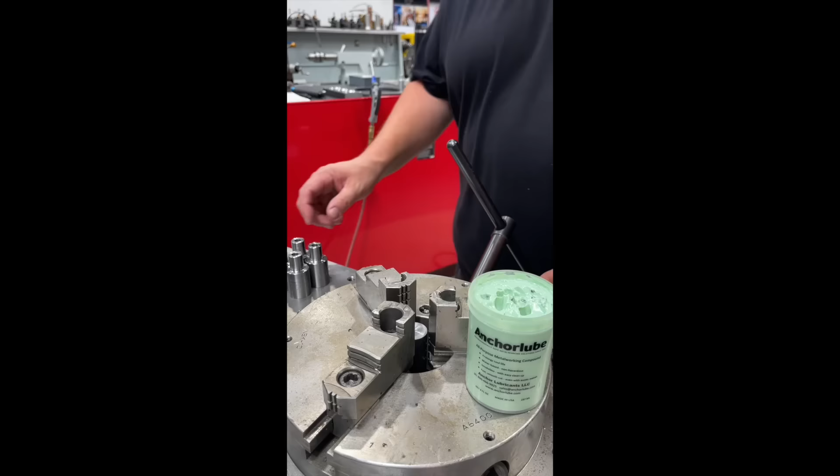Quick and easy. So I have ordered a couple of the Techniks brand collet chucks. This is the ER25 collet chuck. This is something I finally realized that they made. You know, Techniks has these on their website. This is made for the 1¼ bar holders that go on my CNC lathe, and then an ER25 collet goes in there. So I got a couple of these. I've already got one installed, and we're gonna go ahead and get another one installed here.

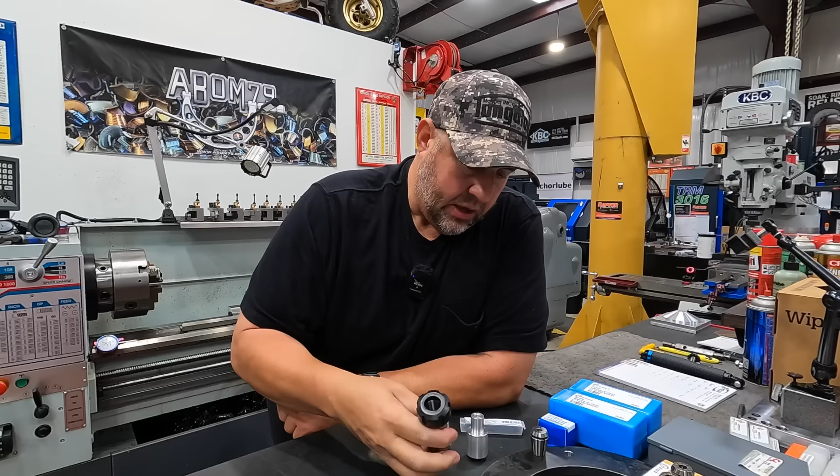I have a 5/16 tap collet right here. This is a Techniks, I ordered a set of these, so I've got them from 1/4 inch up to 1/2 inch in an actual tap collet. We have some new Cleveland taps right here, so this is a new 5/16 spiral flute tap from Cleveland. We have our tap collet made to hold a 5/16 tap, and we'll install that in the collet right there.

So excited about these guys right here. I think this is going to be better than the other collet chucks that I have on there already, but having these 2 on there are going to give me the ability to have 4 round shank tools on the CNC lathe. I'm pretty excited about that, because I needed to add a spot drill, then 2 different drill sizes, and then I wanted to be able to go back in with the tap. So I needed to have 4 holders there, so that's what we're gonna do.

Okay, I'm over here on the CNC lathe. I've already got the first collet chuck installed right here. These are the 2 that I previously had installed, and I'm liking these Techniks ER25 that fit the pocket so much that I've gone ahead and ordered 2 more of these. I'm going to remove these and just save them for if I need another pocket with a round shank tool, since I have another one of these blocks. That way I have 4 of these collet chucks that are all kind of equal on the stick out. So we're going to get ready to install that one.

I've already indicated the tool block right here using our coaxial indicator. Something I picked up on this job, big thanks to Steve Sherman over at Milltronics, he gave me this tip. I didn't think about this before: once you get one of these pockets indicated in X, these other ones should be in the same position because you're on the same rotational center line. I've been indicating each one of these individually and then doing an X tool to mark the X0 location. That's something I just realized. I should have realized this a while back, but I just didn't think about it. Pretty simple to do.

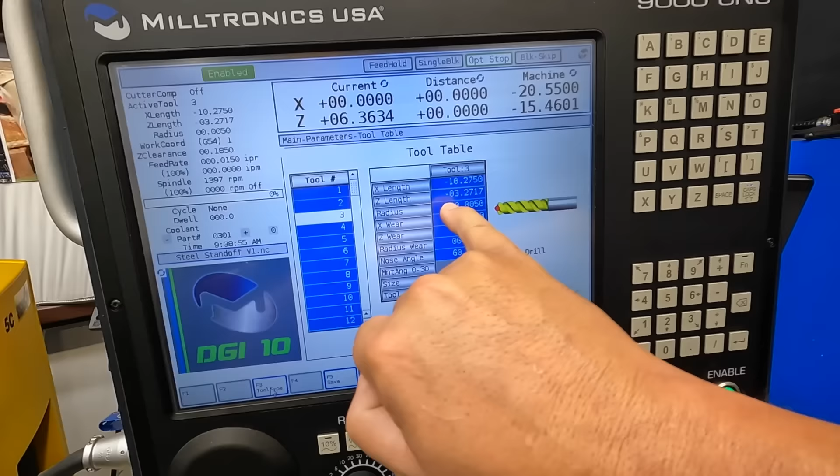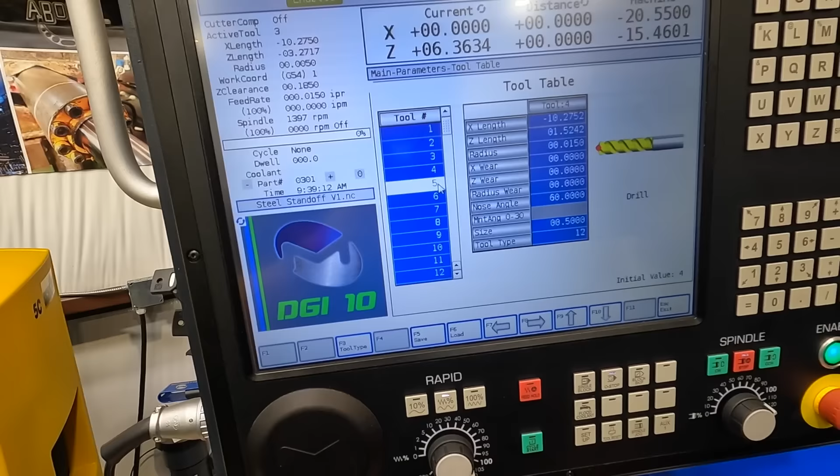Over here on the controller, I'm going to go back into auto mode. If we go to our parameters in the tool table, we have our X length, which is 10.275, using tools 3, 4, 5, and 6 on our tool turret. I've got these indicated, so they're really close, just using the coaxial indicator. 10.275, and then the last one, 10.274, so it's about 1 thou off from the other previous tools. That's the one we're doing right here, tool number 3, about 1 thousandths off.

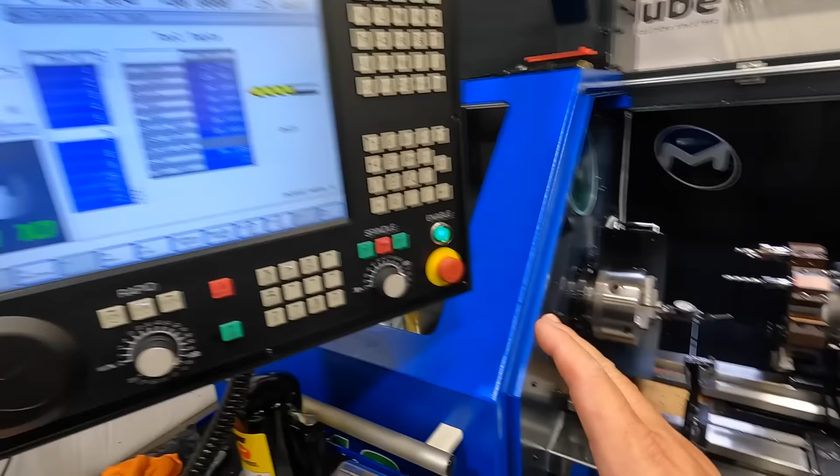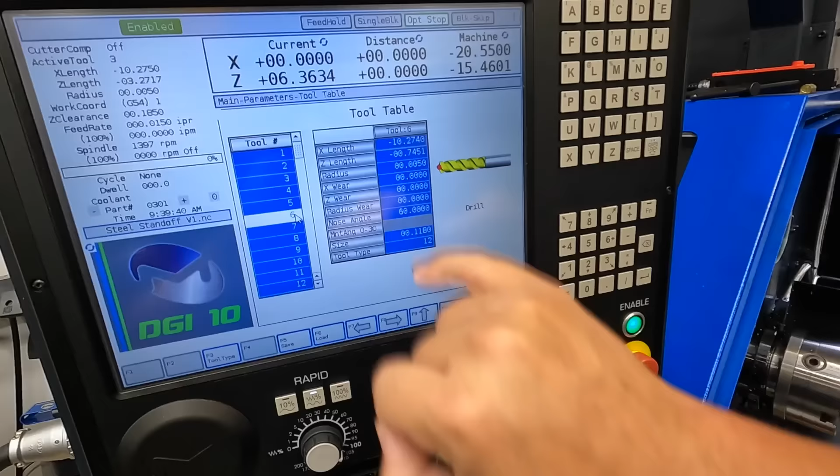So what I was getting at, because this is stuff I'm learning obviously, is that once you have one of these indicated and you have your X position, your X length, then you can go to the other tool and enter the same exact value that you already indicated for the previous pocket, making them all the same. Very simple, basic, I know, but I'm glad I finally picked up on that because I should have learned that a long time ago. So I don't have to do this every time I want to put a new tool in. This was the first time we stuck this tool block over on number 3, so I was adding one we haven't ever indicated before. Just a nice little trick I finally picked up here on the CNC. Always learning, but I'm really enjoying it.

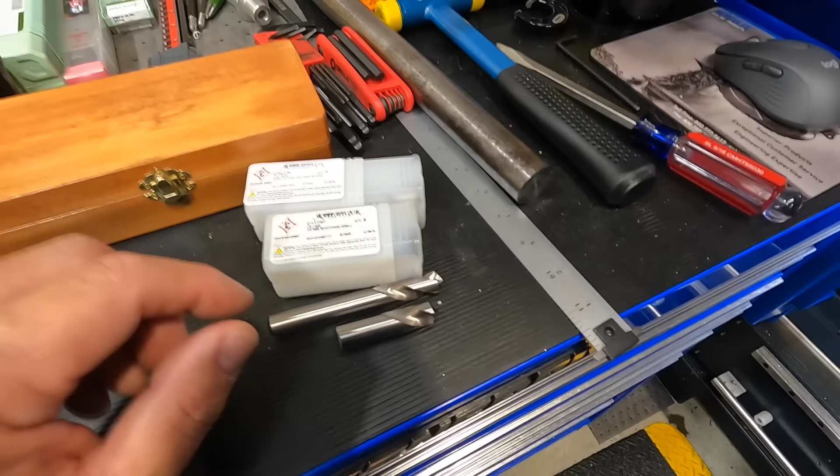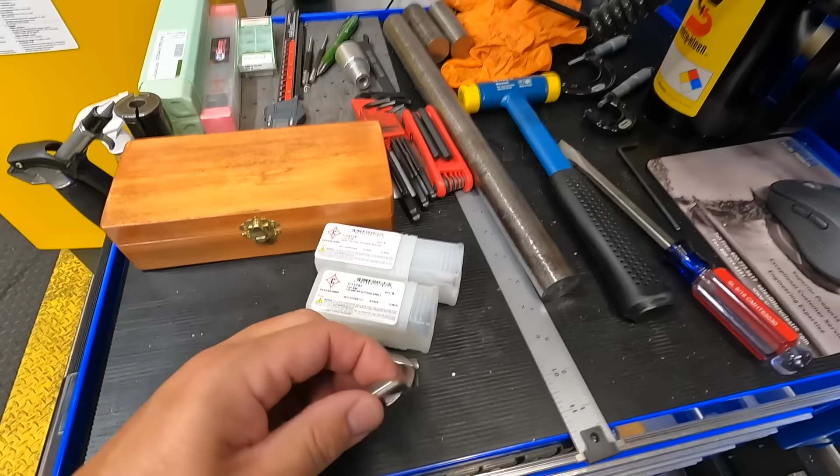This tool right here is our new Techniks collet chuck, and I have a 1/2 inch diameter spotting drill installed into that one. These are some spotting drills I just picked up from Cleveland. This is the one I have installed right there, and I needed a little spotting drill like this so I could spot our workpiece and then come in with the following drills. I didn't know which one I wanted, so I got these guys too. These are considered the shorts, they don't have any side relief on them at all, just ground to the diameter, but these work great for spot drills as well, just a little bit longer. So I'm going with this one right here, and it's been working well on my first 4 workpieces that we already did. I was going to point that out.

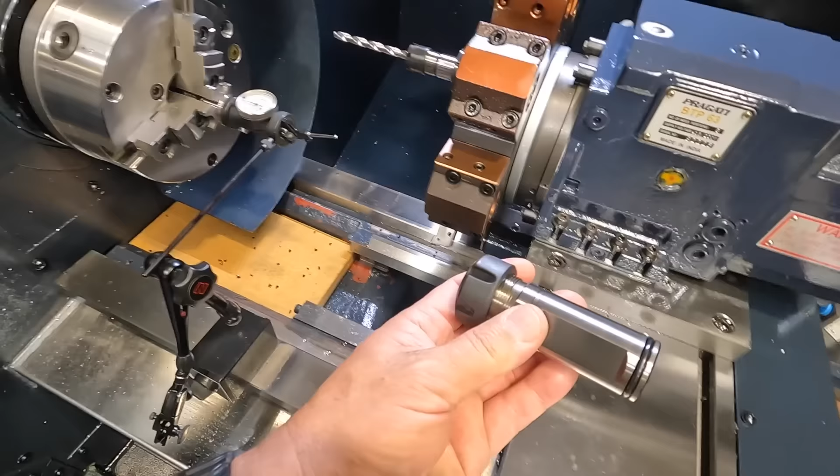This one we're getting ready to install right here is going to be our 5/16 tap. I've got the collet chuck installed, and I'm just verifying that I do have this in the center.

So that needle's wiggling less than half a thousandth on rotation right there, so I know that one's pretty good. This is a different manufacturer tool block than the previous ones here, so maybe it's a thousandth different on the center line. I don't think a thousandth on the rotational center line is really going to make a big deal, especially on drills. So I'm just going to leave it indicated where it's at. But if I add another one of these later on, now I know I don't have to do this - I can just look at the value of one of these in X and make it the exact same.

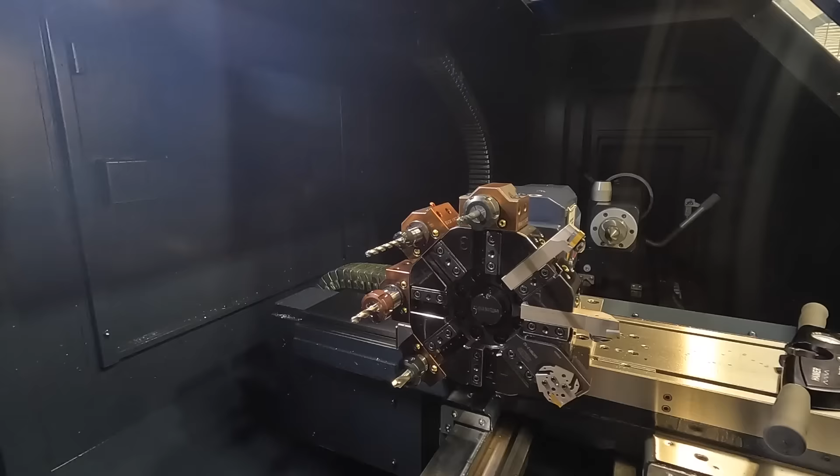All right, we got our new Cleveland tap installed. I'm going to use my Haimer Torque Master to get it torqued in properly.

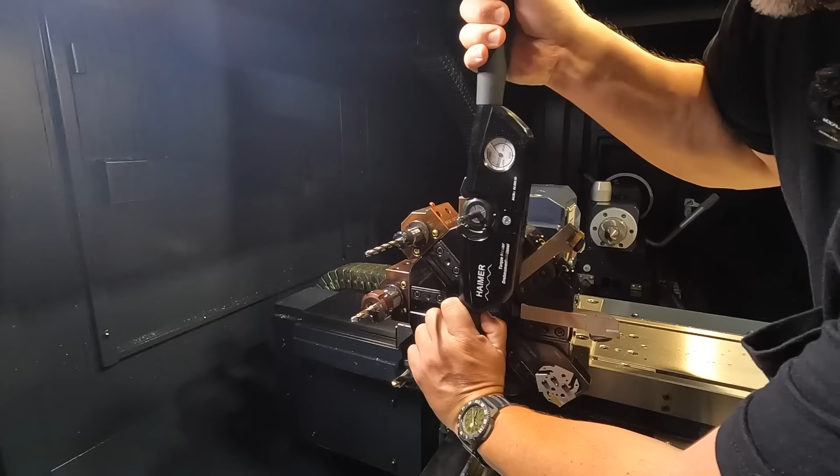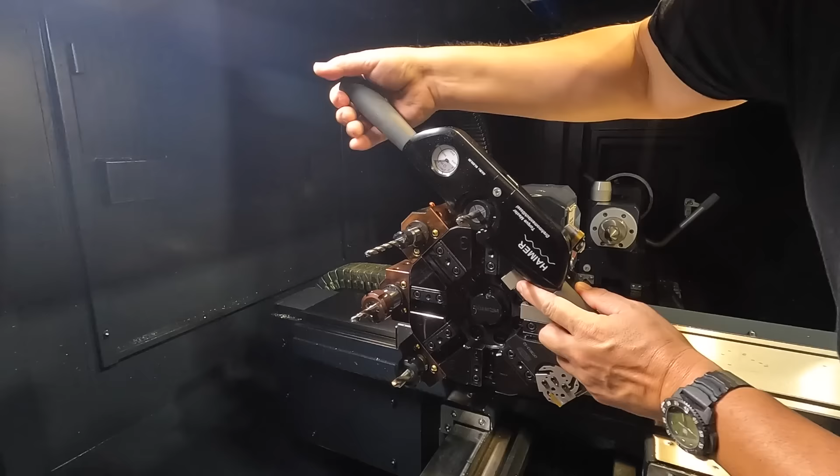You have a line on this dial indicator here indicating what size collet you're tightening, and you just line it up on it, trying to be sure that I don't slip off and split my hand wide open. That should be right, ER25. Give it another pull, make sure. Yep, I'm there.

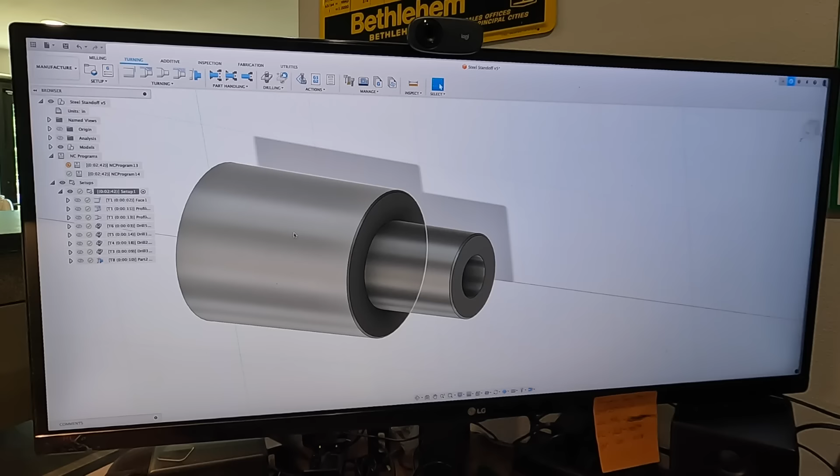We're starting with 1 1/4 inch cold rolled material. I don't know if I mentioned that - we're turning 1018 cold rolled. All we're doing on the outside is taking a 10 thou cut on there just to clean it up and make it look pretty, that's all we're doing. So the diameter on that doesn't matter. It's going to be a plasma cut hole that's dropped into, and then it's a fillet weld all the way around it. All right, so if we go back to our analysis there, we got it split.

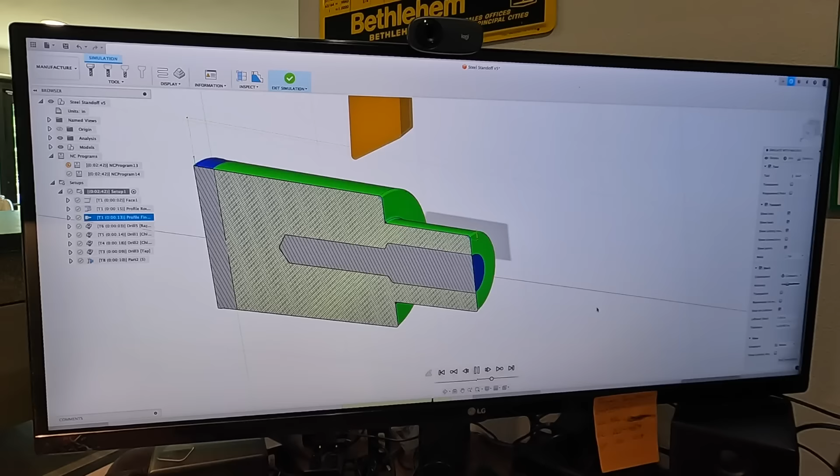I'm going to just do a simulation so you can see what it's going to look like here. Play our simulation, so we'll make a face cut. All right, and then we're going to rough off the OD there, and once it's roughed off, it's going to come back and make a finish pass all the way down it, clean it up. And then we'll come in with a spot drill, 3/8 drill, then our letter F tap size for 5/16. And notice, let me come back right here.

This area right here, what I have done is I've taken our letter F drill and I've taken it to an additional negative 125 thousandths, so 1/8 of an inch right here. I just wanted to point that out. So we gave that a little extra depth so that when we come in with our tap - this is going to be our tap right here - and I have it set to a positive 0.125 so that this should give me a quarter inch of leeway right here between the bottom of the hole and the bottom of the tap.

So this is obviously my biggest worry right here, is bringing the tap in and then bottoming out and snapping it off, or breaking it off otherwise. You know, I'm just really concerned about this. So you guys are going to see my first rigid tapping on the CNC lathe with this job right here.

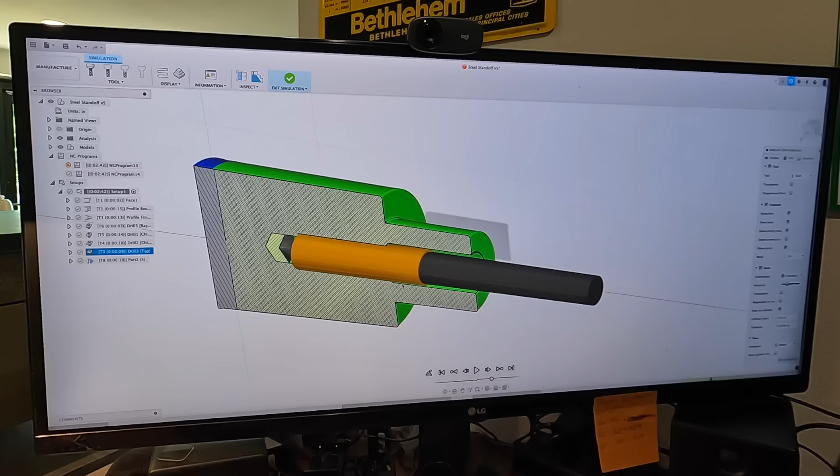All right, so anyway, we'll finish this out. Tap comes out, and then I did want to show you this. Let me back up and show you what we're doing right here. I'm going to bring this back around to the top, and let's come in. So this is our parting.

I've got my Tungaloy parting tool, it's going to come in. I'm going to slow this down, and what you're going to see it do right here, I'd like to chamfer the back side. So by the way, thanks to Kevin at Mechanical Advantage for going over this with me. I told you we train every week, and he goes over these programs and looks at them and helps me, and he made a suggestion on breaking this corner here.

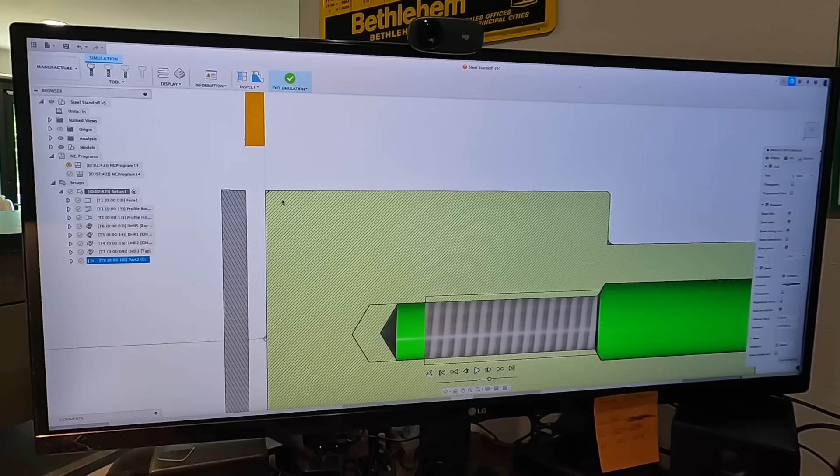So if you come in with our tool, let me see if I can do it this way. Tool's going to come in, it's going to go down to that depth right there to give us a little bit of relief in this corner. All right, and then it's going to come up. I went the wrong way.

Where you at? There we go.

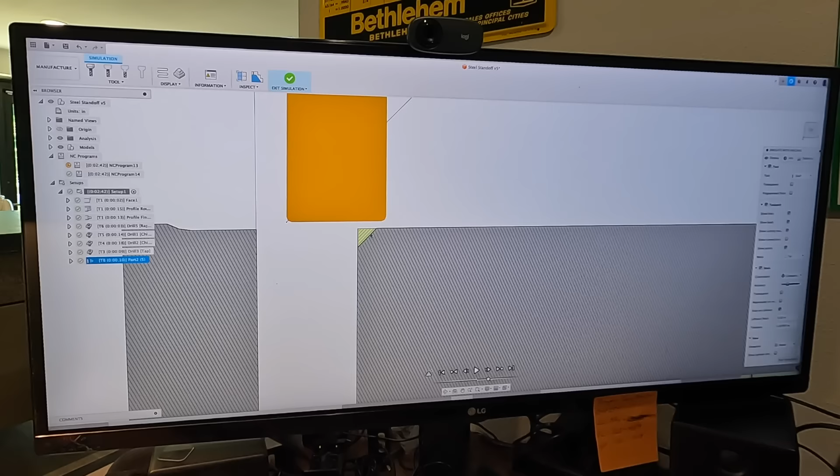All right, so it's going to come in at a 45-degree angle and break a 15 thou chamfer on that back side, just like so. Then it's going to continue on with the parting and part the piece off, like so.

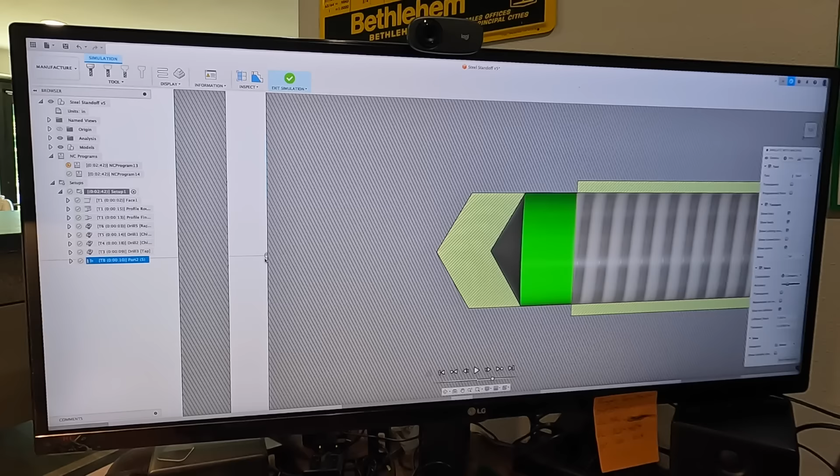All right, and then that'll be the end of the program right there, so that should be a finished part. The only thing I'm going to have left at the end is right here where the parting tool parts it off—there's going to be a little nub that I'll just take to the manual lathe and face off. It only takes 30 seconds to do that. Otherwise, we should have a completely finished part once we're finished.

So let's go to the lathe and see if we can make this happen. I'm ready to give this a go.

I wanted to point out, so when I do my stock here, I just pull it out to 3 1/4 on the rule, and then the first pass will be a face cut, and it'll clean up about 10 thousandths off of that. So rough it, finish turn it, and then we'll go to our drill cycles.

And I haven't tapped yet, so this is going to be the first run. I've already Z'd it, Z0 on the face after we faced it off there. Everything should be good, so if it breaks, it breaks. Let's just hit cycle start and see what happens, all right?

I'm gonna run the turning dry just so that it doesn't throw coolant everywhere, but I am gonna turn it on for the finish and for the drills as well.

These roughing passes look beautiful on this 1018. I will say that the finish pass doesn't do as well because we're only taking 10 thousandths, so it's going to try to string on us. What I'll do is stop the spindle and remove the bird's nest if it's on there.

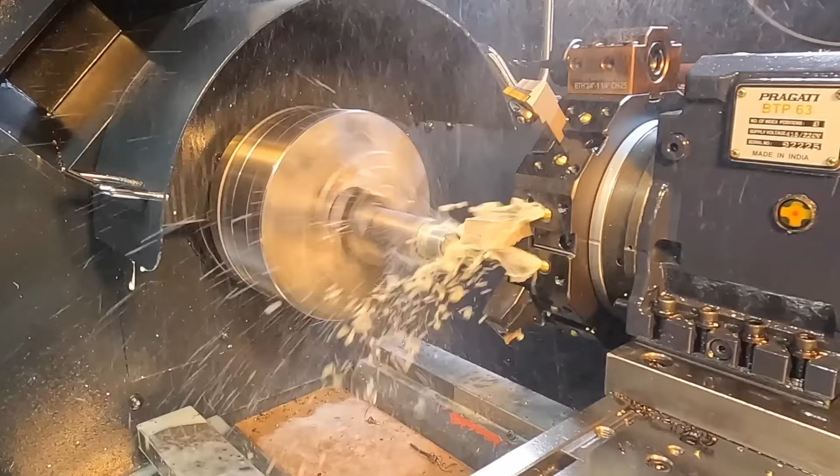All right, we're going to engage coolant. Clean it up 10 thou off that OD, and you see the stringy chips there hanging on the tool. So what I do here, I have an optional stop, and I just stop the spindle, come in here and knock that off, and then I'll start spindle and hit cycle start.

Let me make sure the camera is cleaned off. Actually, let me clean this off real quick. Okay, spindle clockwise, cycle start.

So first drill is going to be a spot drill. Second one's going to be our 3/8 drill. I have a breaking chip cycle on this just to break the stringy chips.

All right, letter F drill, tap size for 5/16. I've got those coolant nozzles adjusted as closely as I can to try to get the most coolant I can in those drills and on the tap as well.

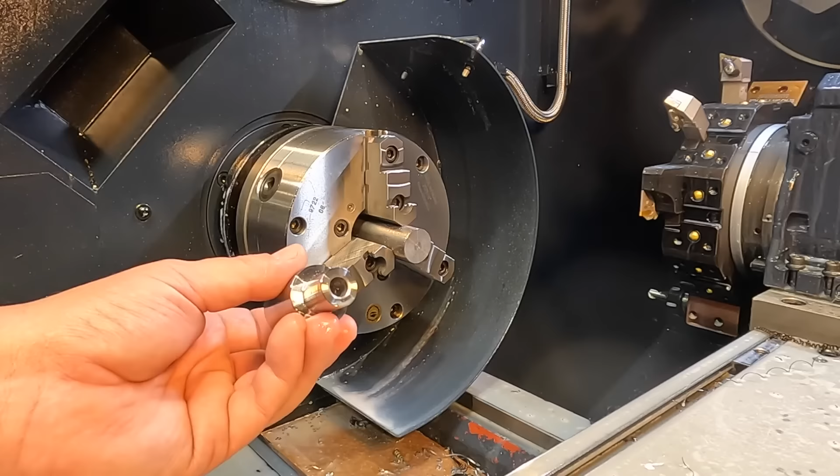I need to go back in our program and just make sure we're running on the correct pitch for 18 threads per inch. And we saw it in the graphics—it should not have went all the way down to the bottom of that hole. I don't know if the chips just bound up because we weren't getting coolant in there, but it really makes me nervous because it's such a deep hole.

We may just go ahead and eliminate this tapping on the rest of these and just go back to our flex arm and finish tapping the rest of them. I don't want to break another new tap.

I mean, that was a brand spanking new tap there, and I can't keep doing that. So we may just have to revisit our rigid tapping with a separate test piece and make sure that everything is functioning like it's supposed to and not on an actual workpiece. That's a bummer, but we're going to go ahead and get the rest of these finished. I'm going to eliminate the tapping cycle so that I can come back to that later.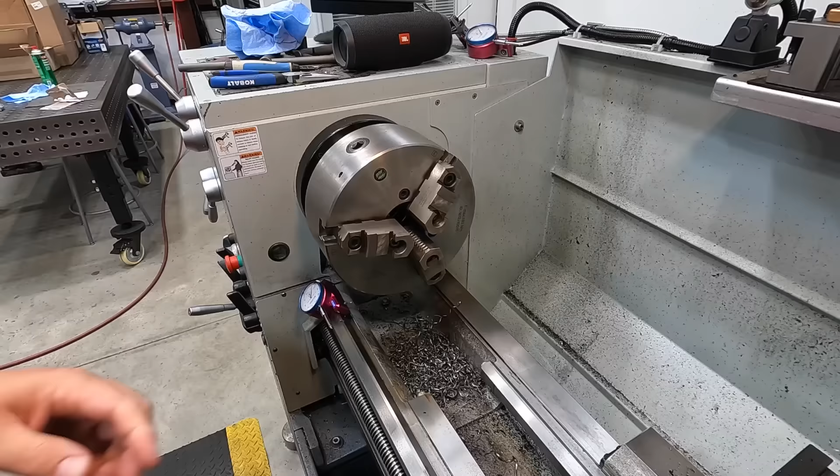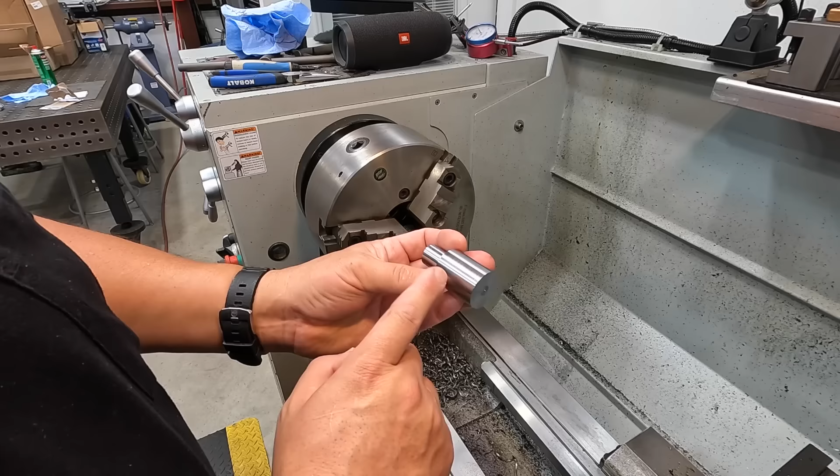All right, I had an idea. Before I continue on, I want to come over here to the manual lathe. I'm going to go ahead and sacrifice this part right here because I've got plenty of material to make another one. I want to go ahead and face the back side of this off so that we can access the tapped hole and see if we can tell if that tap is all the way in the bottom, if it bottomed out, or if there's a gap down there like it should be. There should be a gap in the bottom. That's what I want to see, because I'm wondering maybe it just didn't have any coolant getting down into the hole, since it is a very deep hole. It goes about 1 7/8 deep, and it could just be lack of lubrication that caused that tap to snap off.

Finally getting there, see it there, but I got to pull it out some. I can't go in there much deeper. That was 400 thousandths there.

All right, I think we should be able to see that.

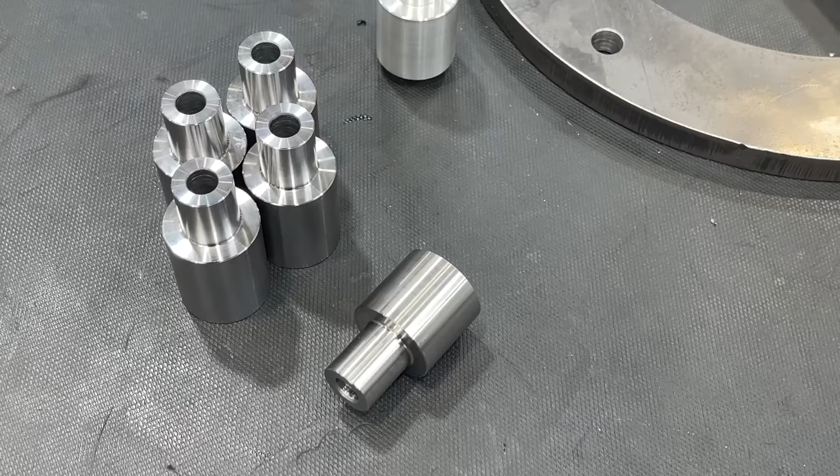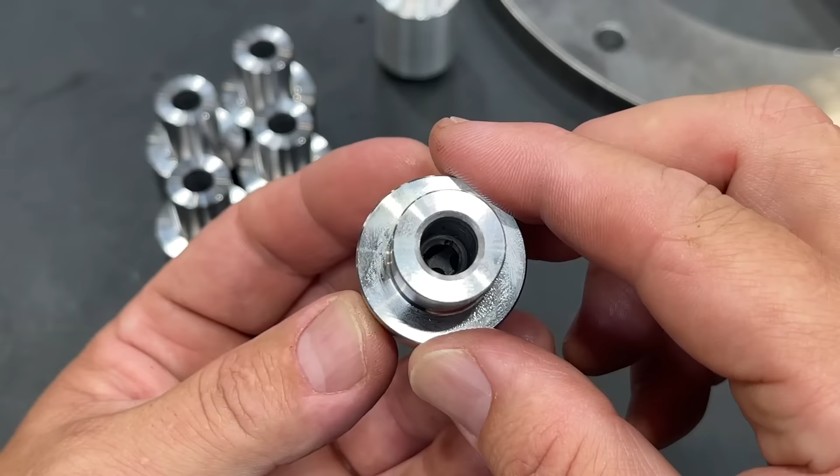Okay, here's a close look at the one where we broke the tap off, and you can see that the tap did not bottom itself out into the bottom of the hole there. So it was still cutting whenever it broke off. So I'm going to make the assumption, I haven't checked the program yet, that either the lead is off from the tap, or it just did not get enough coolant or lubrication down in there, galled it up and broke it off. So you can see how deep it is. Like I said, that hole goes 1 7/8 deep all the way through there. It's a pretty deep hole.

So I think for the rest of these, since I've got to make 10 of these, all right, so we've got 4 of these here, I'm going to go ahead and just make 6 more. And instead of risking breaking another tap off, since we're learning what's going on here, we'll just go to our flex arm and power tap them. That's what I did with these guys, and it worked just fine.

So that is a total bummer. I was really excited to see this happen for the first time, but unfortunately you just can't get everything right the first time, every time. It only works right part of the time, correct? I don't know, did I say that right? Anyway, this one was a failure, but let's go ahead and get the rest of these guys finished.

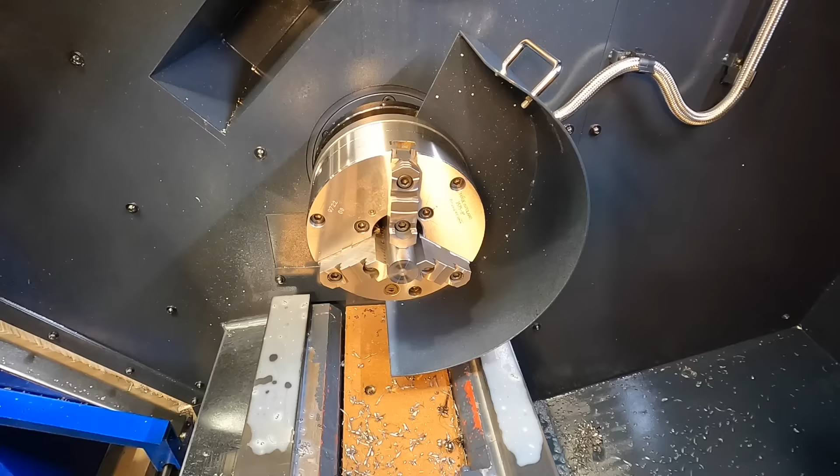All right, let's finish these guys. So this is my little order of operation. I only got a few of these guys, so this is the way we're doing it. Scale this out to 3 1/4.

Okay, let's make one without the optional stop and see how long it takes.

I turned optional stop back on because that bird's nest right there. I'll turn it back off after we finish this. I just want to be able to get in there and safely remove these chips like that, get them out of the way. This one came way over here. All right.

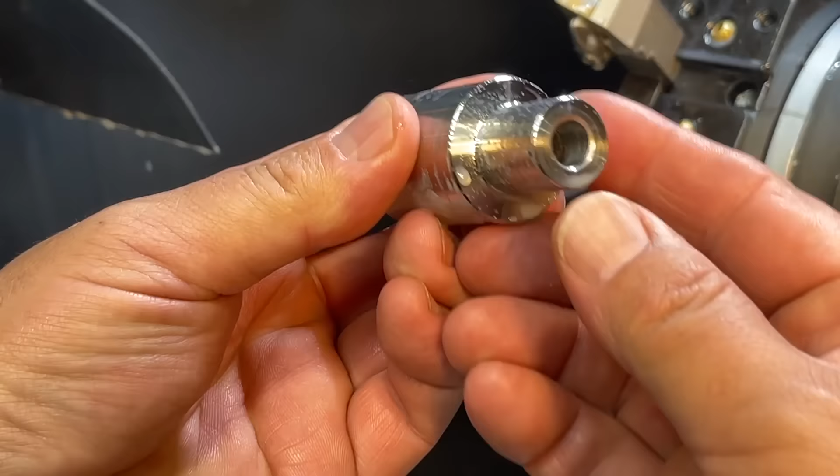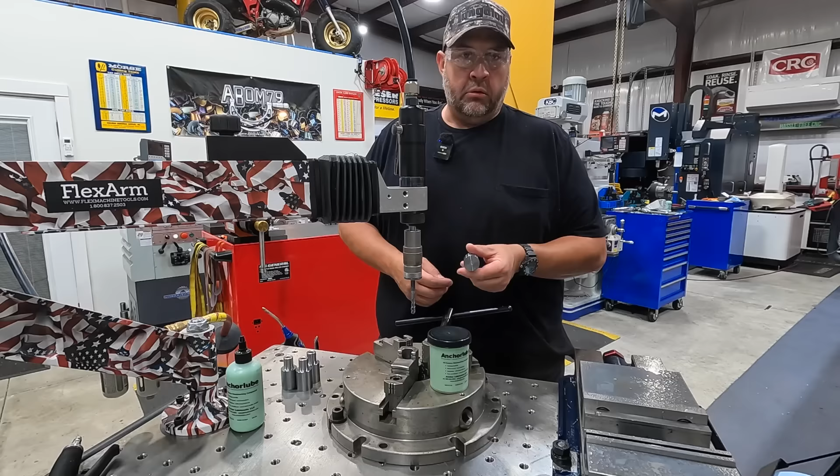All right, so we'll just use our flex arm here to go ahead and tap the remaining standoffs that we machined. I already went to the manual lathe and faced that little tip off the back of it, so that's already done. I've got a little stop so we can just take our workpiece and drop it down in the chuck there and snug it up.